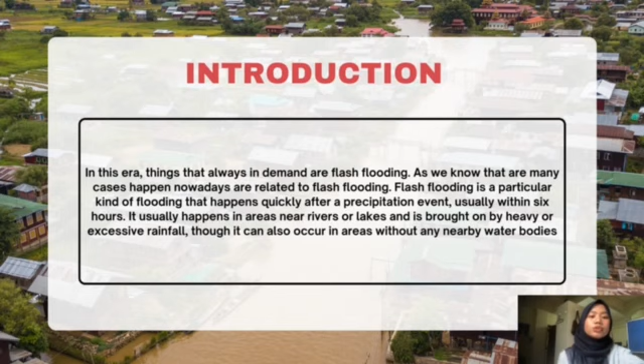Okay, for the introduction, in this era, things that are always in demand are flash flooding. As we know, many cases that happen nowadays are related to flash flooding. Flash flooding is a particular kind of flooding that happens quickly after a precipitation event, usually within 6 hours. It usually happens in areas near a river or lake and is brought on by heavy or excessive rainfall, though it can also occur in areas without any nearby water bodies.

Okay, we go to the study area. The study area is located at Jalan Kluang, Taman Universiti, Parit Raja, Johor. Parit Raja, Johor is a mukim located in the district of Batu Pahat, which is a lowland region. Agriculture is one of the region's main economic sectors thanks to this lowland topography. Batu Pahat district is susceptible to flooding because of its low elevation. In this area, the current drainage system plays a significant role in causing flooding.

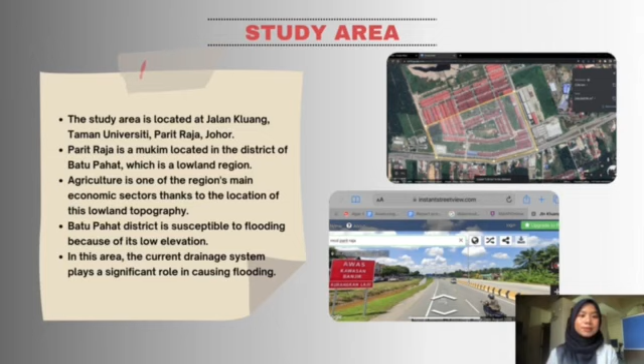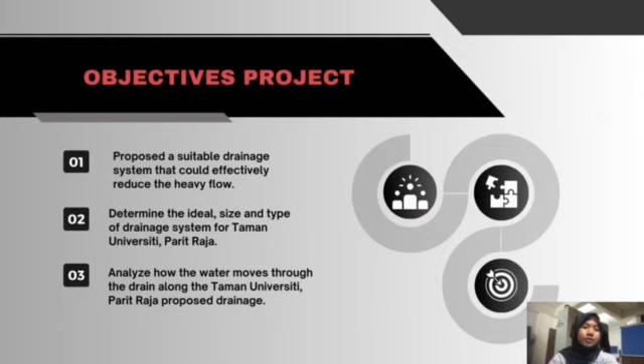Okay, for the objectives, first, we propose a suitable drainage system that could effectively reduce the heavy flow. Second, determine the ideal size and type of drainage system for Taman Universiti Parit Raja. And lastly, analyze how the water moves through the drain along the Taman Universiti Parit Raja proposed drainage.

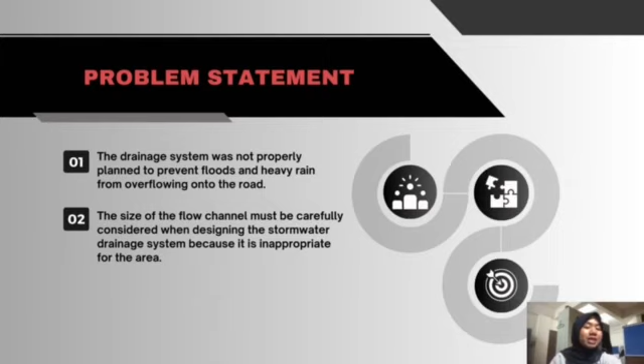For the problem statement, the drainage system was not properly planned to prevent flood and heavy rain from overflowing into the road. And lastly, the size of the flow channel must be carefully considered when designing the stormwater drainage system because it is inappropriate for the area.

Stormwater drainage. The drain was determined to be a natural open channel drainage system based on the research area. There was grass, sediment, and mud along the existing drain. The water flow will be impacted by this limitation. As a result, it is recommended that the drainage be upgraded into a structural type of drainage by building a new drainage system using a U-shaped reinforced concrete drain.

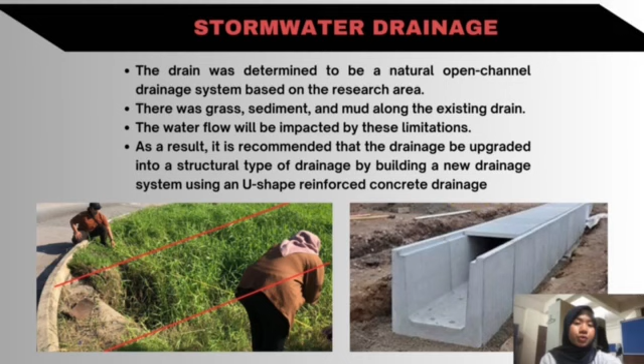My matric number is CF220219. So today we continue this presentation with the methodology. The aim for this project was to hand complete the drainage plan in the part of Jalan Kluang, Taman Universiti Parit Raja, Johor, to correctly suggest a drainage plan that works. The area, climate and condition were designed using an appropriate analysis process. According to the report, the region was vulnerable to flooding brought on by flash floods, which happened during brief but powerful downpours.

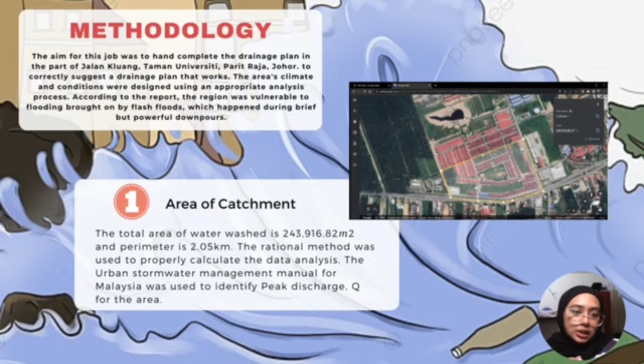So I will continue with the first step, which is calculating the area of the catchment. The area was surveyed by our team members to study and collect all information that can be obtained in the area. The catchment area was also calculated using Google Earth to get the area and dimensions of the desired area. The total area is 243,916.82 square meters and the perimeter is 2.05 km. The rational method was used to calculate the data analysis. The Urban Stormwater Management Manual for Malaysia was used to identify the peak discharge, Q, for the area.

So the second step is calculating the Manning roughness, n. Data from the table must be obtained before we can begin the calculation. Our team concluded during the site survey that the area was a grass drain with tall grass cover of more than 150 millimeters. So n, the Manning roughness, is 0.050. Table 2.1 serves as the source for the second table.

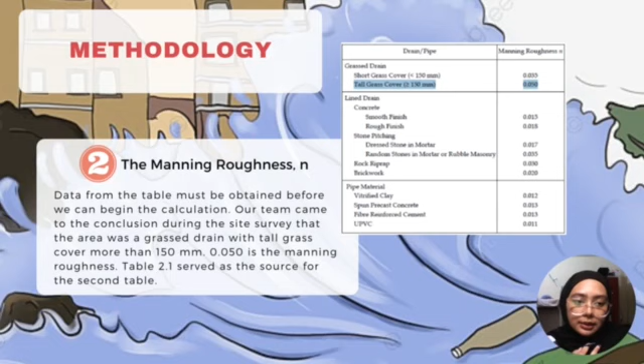So the third step is calculating the dimension and area of the drainage. According to the information provided by our team members, the drainage design was a trapezoidal drainage with an area of 7.25 and the drainage perimeter was 7.35 meters. The hydraulic radius R was computed using all the data from the trapezoidal drainage and the answer was 0.97 meter.

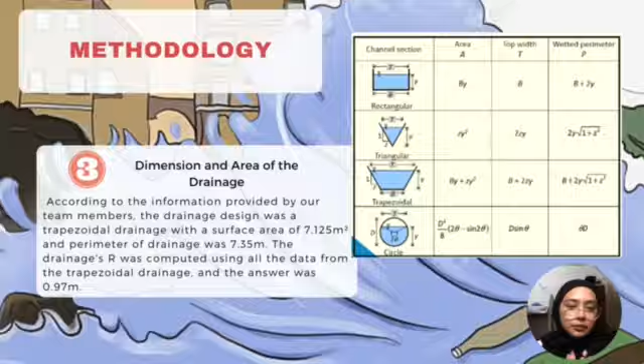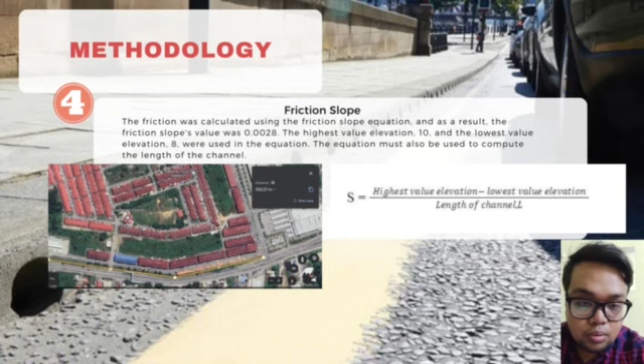Okay, for the next step, I will continue with the friction slope. The formula for friction slope is highest elevation minus lowest elevation divided by the length of the channel. The length of the channel that we got from Google Earth is 702.27 meters. The highest elevation is 10 and the lowest elevation is 8. Using the friction slope formula, we got 0.0028.

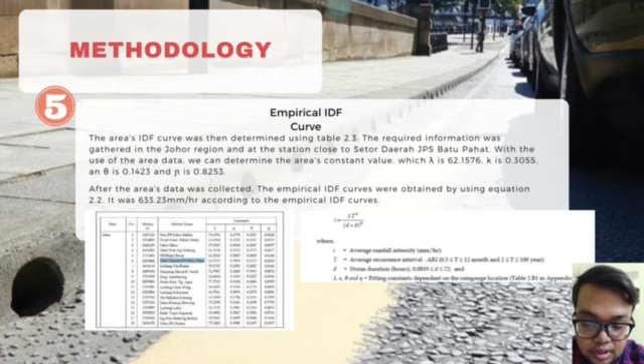Okay, continuing to the next step, we are calculating the empirical IDF curve. There are two components of the formula that we need to calculate, which are the average recurrence interval and the storm duration. After that, we use the formula with data from MASMA for the JPS Batu Pahat station. After inserting all the data such as average rainfall intensity, average recurrence interval, storm duration and others, we get the empirical IDF intensity of 633.23 mm per hour.

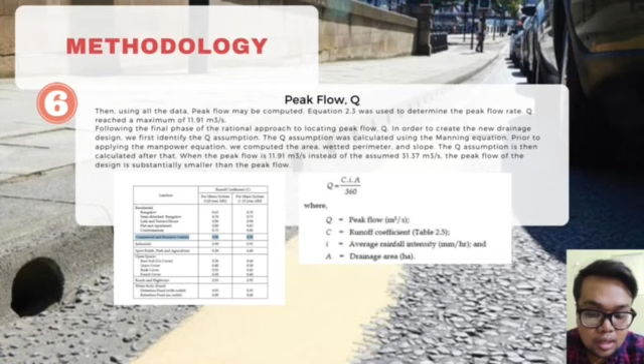After we get the IDF value, we continue with the last step, which is to calculate the peak flow. We use the formula as stated in the slide. For the runoff coefficient, we refer to the table. This area is a commercial and business center, and the design is for over 10 years. Using the coefficient of 0.95 times the IDF intensity we calculated, times the area, divided by 360, the peak flow we get is 11.91 cubic meters per second.

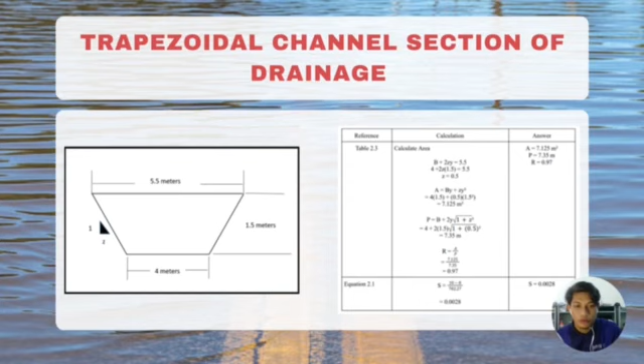And next, refer equation 2.1. For S, we get 0.0028. Okay, for the next slide, refer table 2.1. TD equal to N times L over 60 times R power of 2/3 times S power of 1/2, and we get 11.29.

Grass drain, tall grass cover more dense, 150 millimeter. And next, refer table 2.4, state Johor, station ID 1829002, and station name Setor Daerah JPS Batu Pahat. For the lambda, we get 62.1576. For K, we get 0.3055, and for theta, we get 0.1423, and last eta, we get

0.8253. And next, table 2.5, type of developments, commercial and business, minimum ARI years is 100, T equal to 100. For next, refer equation 2.2, I equal to 633.23 millimeter per hour. Okay, for the next, runoff coefficient and peak flow, refer table 2.6, then use commercial and business runoff coefficients 0.95, more than 10 year ARI, C equal to 0.95.

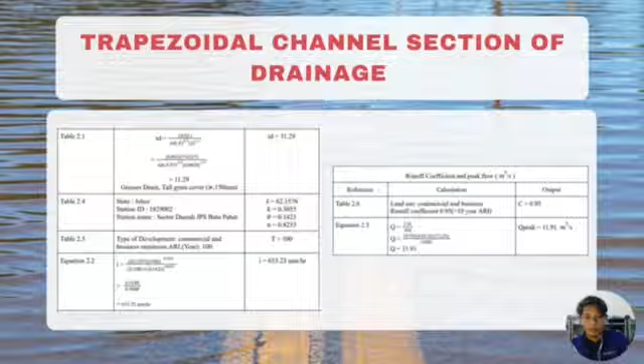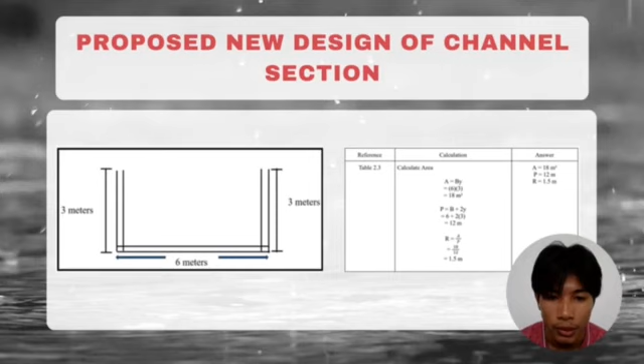For the friction slope, the value is still the same, 0.0028. For the drain flow for the new design of channel section is 8.44. For the rainfall intensity is 660.42 millimeter per hour. And finally, for the peak flow for the new design is 31.37 meter cube per second.

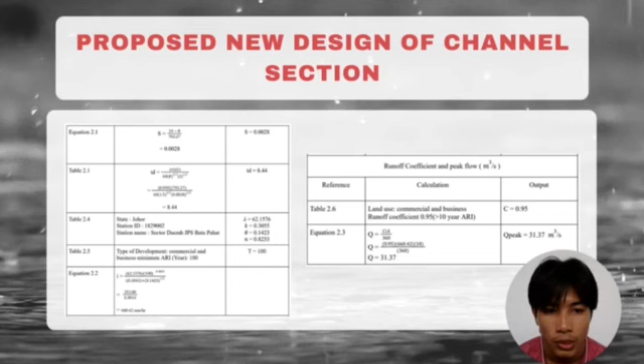Okay, the next slide is proposed flood mitigation. A good drainage system is essential for preventing floods in the study area. To address the issue of inadequate drainage in flood-prone areas, it is recommended to modify the existing drain. Without proper drains, water accumulates and causes flooding. Improving the drain by increasing its capacity will minimize damage to properties and reduce health risks and potential fatalities in the future.

The proposed drain will be built in the same location as the previous one, but with a U-shaped design made of reinforced concrete using cement, aggregate stones, steel bar, and sand. Excavation, sand placement, drain installation, compression, and connection are necessary for the construction, which requires the use of an excavator.

The use of material like cement ensures smooth water flow with less resistance compared to grass. The drain's slope and flatness are carefully calculated and constructed to effectively drain water even during heavy rainfall. The drain construction aims to prevent future floods and also provide safer road conditions for residents, UTHM students and bus stop users during and after rains.

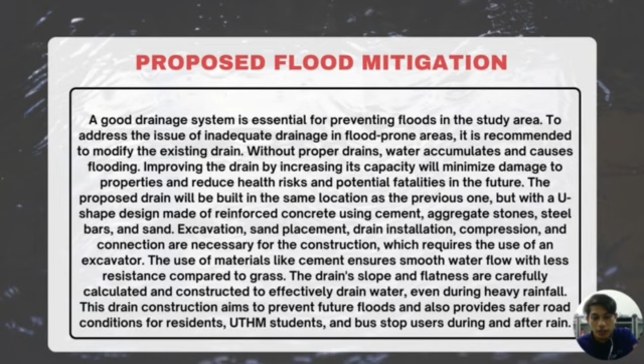Next, for discussion, after performing the previous calculation, we discovered that the suggested new design for the channel section passed because the flow design of the discharge was found to be higher than the peak flow of the discharge. In addition, as indicated in the table, we discovered that the flow rate of each drainage size varies depending on the length and depth of the channel. So the table shows the comparison between the old and the new design drainage size, before and after.

So Google Earth is a computer program that creates a 3D depiction of the Earth mostly using satellite imagery. It is undoubtedly the most well-known and commonly used geographic information system. In addition, this program offers a terrain flight simulator and tools for measuring distance. Thus, in this project, the cross-section of the drainage area is measured using a logical way to determine the value of discharge. For this method, we discovered that the catchment area is 5.42 hectare, which satisfies the proposed area criterion that the area be less than 200 acre.

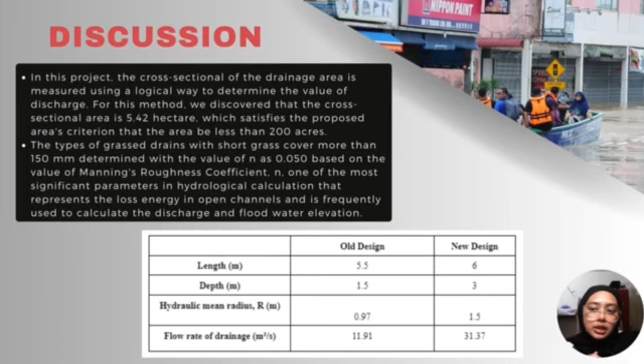As a result, Manning's equation holds true for constant water flow rate through a channel with a constant size, shape and roughness of the slope. In addition, we chose to increase the drainage depth and width in order to prevent flash floods during the rainy season; when it rains, water flows effortlessly and there's little chance of clogging.

Okay, conclusion. In summary, there are a number of civil engineering projects that require hydrological study to be successful. Hydrology is a broad field that is essential to society, particularly in civil engineering, to develop infrastructure for water resources so that adverse environmental effects are minimal. One of the fundamental responsibilities of the design and engineering team is to make sure that there are no drainage problems on the job site, particularly with regard to how structural work will be impacted by uncoordinated weather or other conditions that could result in flooding from the drainage.